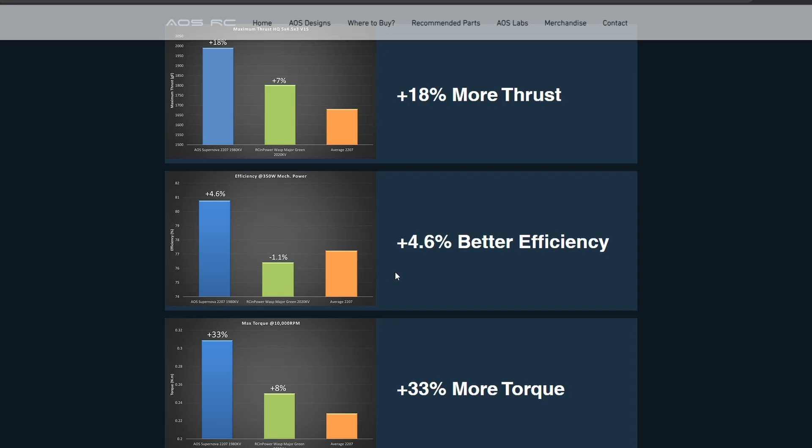About a month ago, a new brushless DC motor was released for use on drones, and the motor boasts some pretty impressive performance increases over pretty much every previous mini quad motor to have existed. And the performance boost is all thanks to what the designers are calling an optimized magnetic design.

And I'm going to be using the ANSYS magnetostatic analysis tool to look at some of the design decisions that they used in making this motor and try to see why they could have an improvement on the overall performance.

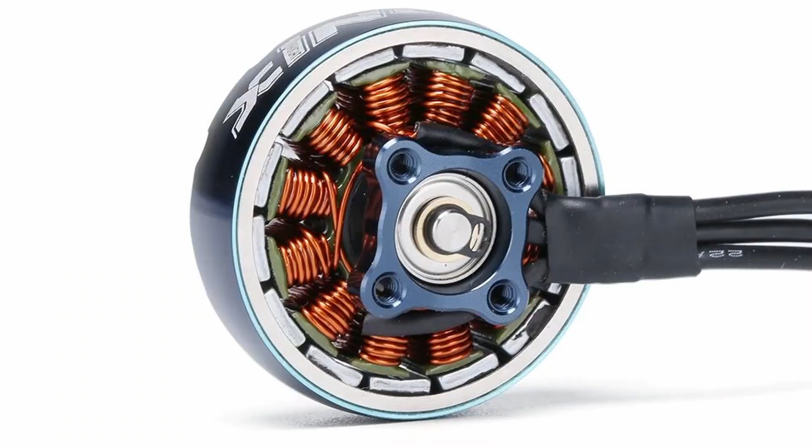So in a typical drone motor, there are a bunch of magnets kind of surrounding a central stator, and that's just the motor. But the difference of this new motor is that it has what they're calling flux rings, which are these little steel rings that go on either side of the magnets. And so in this very simple model of the motor, I've added those steel rings, and I've also modeled a motor with 14 magnets and 12 stator poles.

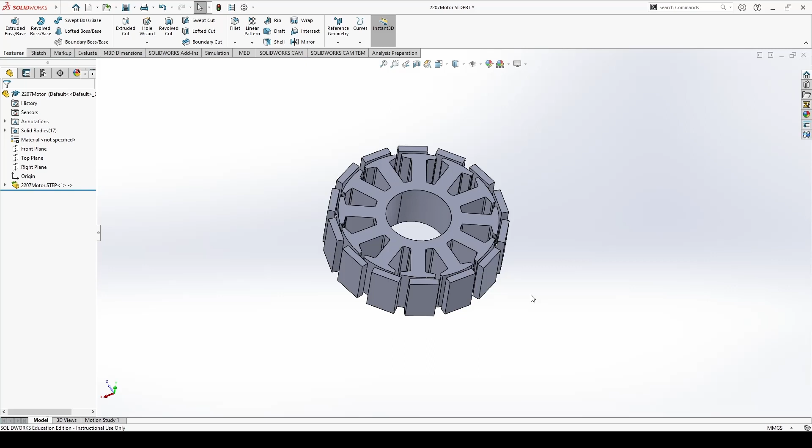We're going to start off in the analysis systems by dragging in a new magnetostatic study, and then we can go into our engineering data. I'm going to start by deleting the two default materials, and then we're going to add the custom materials, which will be an air material and then a neodymium 35 magnet material, which we'll call ND35. For the air material, we can drag in an isotropic relative permeability, and we'll set a value of 1, and the unit can be left blank.

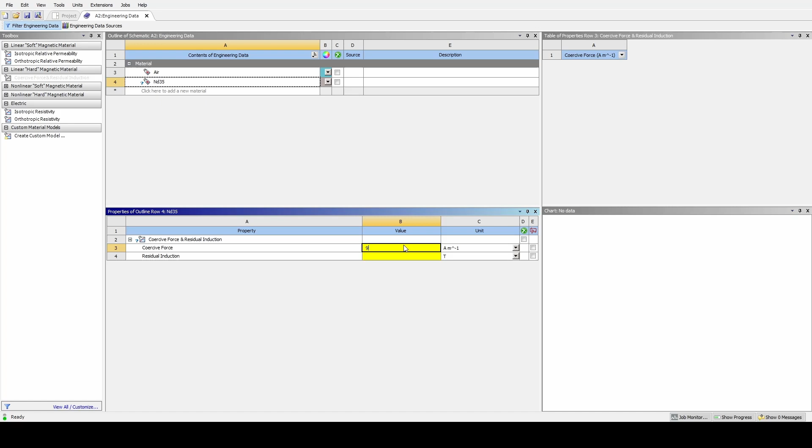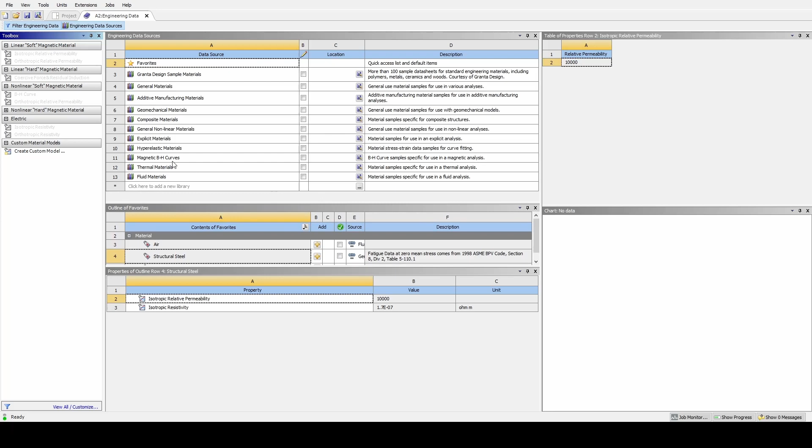And then for the neodymium magnet, we'll go into our linear hard magnetic materials and drag in a coercive force and residual induction. The coercive force is going to be 9e to the 5 amps per meter, and the residual induction will be 1.2. We're also going to open up our engineering data sources and open up the magnetic materials in the magnetic BH curves, and I'm going to select the M19 steel variety.

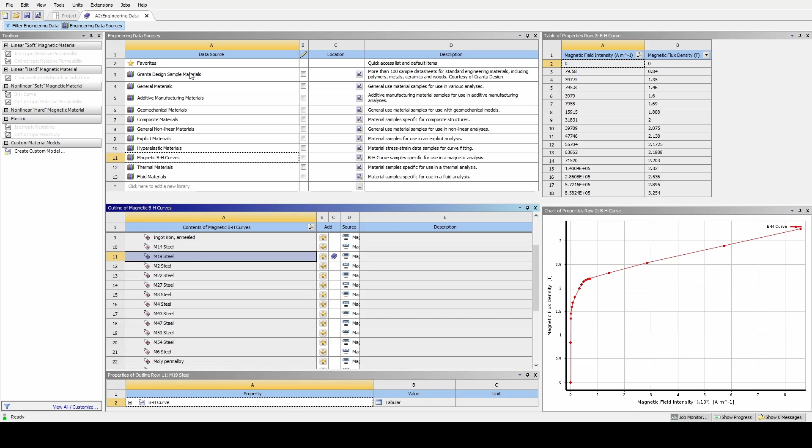So we can use the little plus button to add it to our materials list. And if we go back to our materials, you can see them here. I've also made sure that these materials don't have any additional material properties. It just has the magnetic ones. So we can go back to our project and open up the geometry in SpaceClaim.

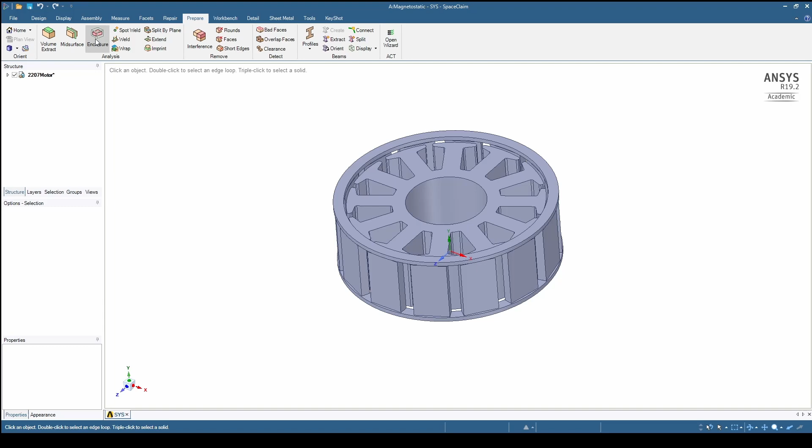And in SpaceClaim, you can see the rotor here with the magnets and the stator and the flux rings. So we need to add an enclosure. If we go into the Prepare tab, we can add that enclosure. And then we need to select all the geometry that we want the enclosure to include. So all the magnets, the stator, and also the flux rings.

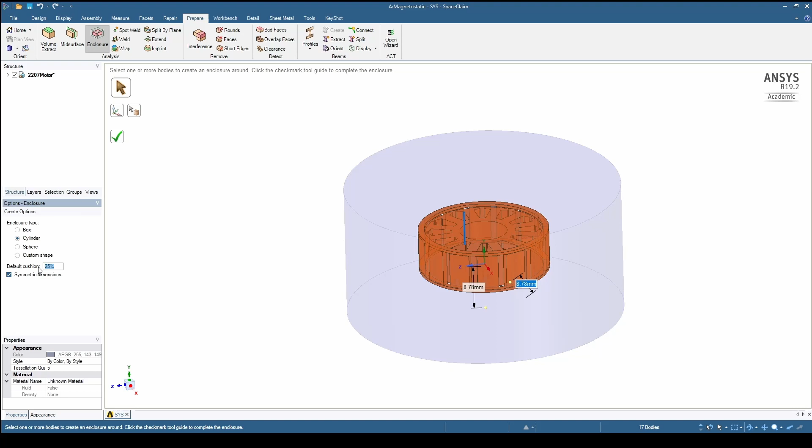And then we can change the type to cylinder. We also need to select the axis that the cylinder will be around, so we can just select any vertical edge here. And then I'm also changing the default cushion to 25% just to save some computational time. And one important selection that we need to make is we need to change the share topology to share rather than none.

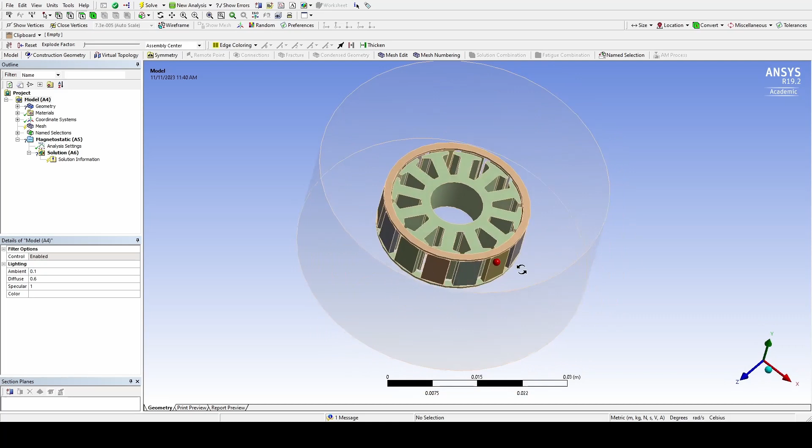Back inside the workbench, we can open up the model tab. You can see our imported geometry here along with the enclosure. If I open up the geometry tab, you can see some of the parts. I'm going to go ahead and rename some of these for simplicity. So we've got both the lower and upper flux rings. And then we can also rename each of the magnets just numerically from 1 to 14. And then we've also got the stator in the center and the enclosure.

And I'm also going to select all the magnets and assign the material to our neodymium material. And then the flux rings are going to be assigned to the M19 steel along with the stator. And then the enclosure.

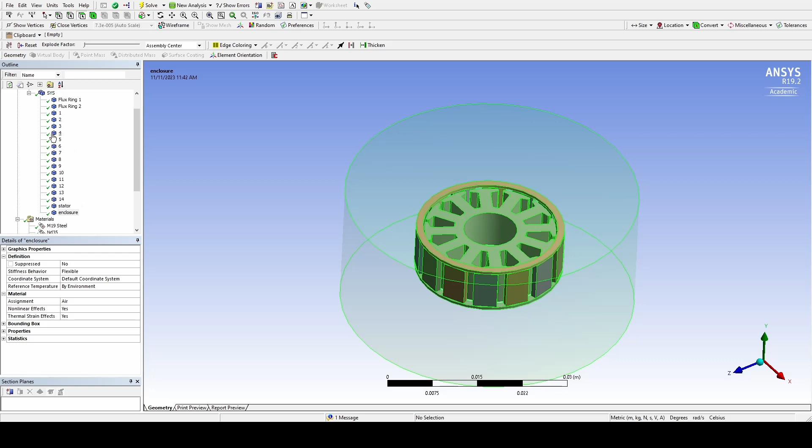And then the enclosure will be set to the air property. And then for the magnets, there's a property to specify the polarization. And so we need to go in and define a coordinate frame for each magnet that kind of dictates which direction the magnetic field points in.

So I'm going to go ahead and hide the enclosure, the stator, so we can get more access here. And then for the first magnet, which is this one over here, I'm going to select the face, and then we can define a coordinate system in the coordinate system tab. So we'll add a new one. We'll click on the face and use that as the origin, and we'll specify the X direction with a geometric selection. And so now we've got the X direction pointing normal to the magnet face.

So now in the geometry, we can click on the first magnet, and where it says coordinate system, we can choose the system that we just made. And I'm actually going to go ahead and rename that coordinate system so it's more clear. If we go back into the coordinate system tab, we can change it to be named 1 to match the first magnet. And you can see that that change propagated here.

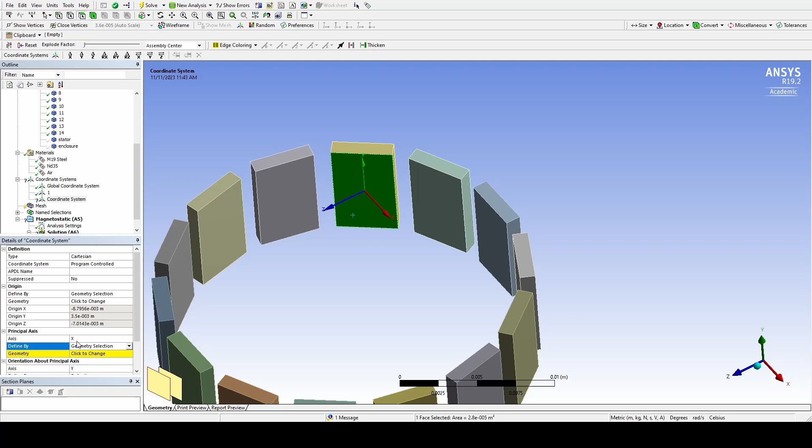So now we have to repeat that for the second magnet. So again, the process is just to create a coordinate frame that has the X direction pointing inwards towards the center of the circle. And then we'll just do that for all the magnets and then go ahead and assign it for all the different magnet bodies. So here you can see I made all the coordinate frames and they all have this X pointing normal into the center of the circle. And then I'm going ahead and assigning all of the magnets to their respective coordinate frame.

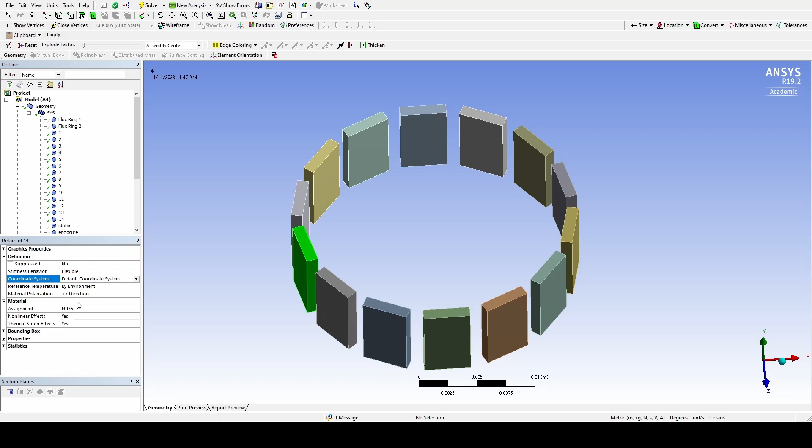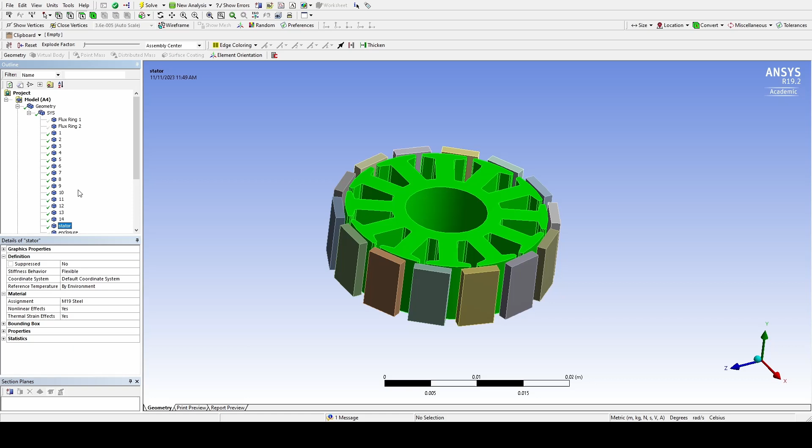And then we also need to take every other magnet and flip the direction because in the motor, the magnets have opposite polarity. And so I'm taking all the even magnets and changing the direction to X negative rather than X positive. So now all the magnets have their magnetic fields aligned in the proper direction. So we can move on to the meshing step.

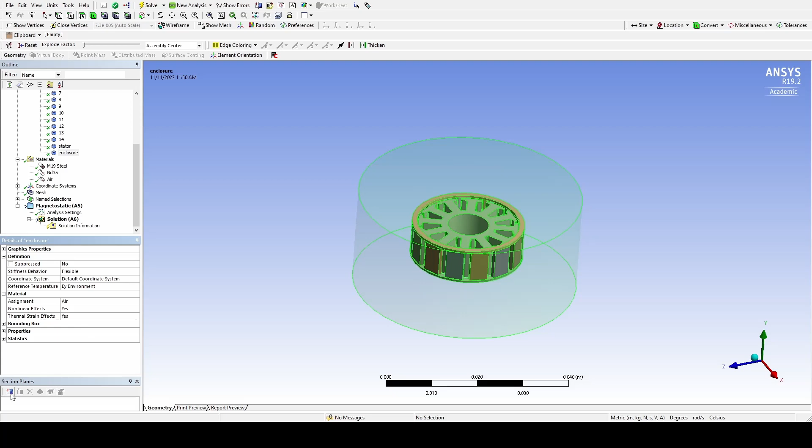Once I re-show all these bodies, I'll start by just generating the default mesh and we can see how it looks. And to get a better look inside, we can hide the enclosure, or we can also make a section plane view. So we can just draw a horizontal line and use that as a section plane and take a look on the inside. And the default mesh is looking okay, but we're going to do a little bit of refinement.

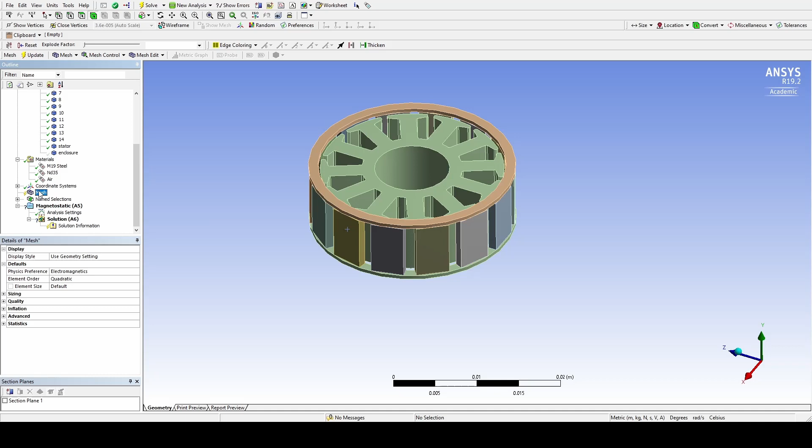So if I turn the section plane off, I can hide the enclosure and get a look inside. And what I'm hoping to do is add a little bit of refinement on the flux ring and the magnets themselves, since there are very few elements in those areas. So to do that, I'll add a sizing method and I'll select all the geometry that I'm going to refine. And then I'm going to set the sizing to 0.3 millimeters. And once we update the mesh, we'll see that it's looking a little bit more fine. There we go.

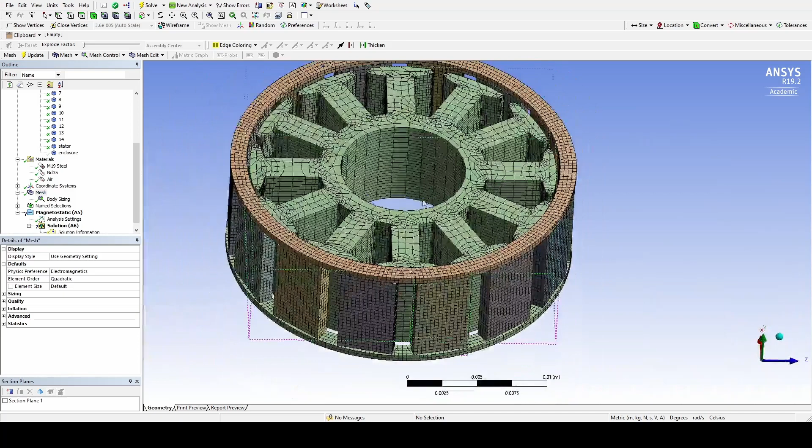And then the last step will be to add our boundary conditions. So that's set in the magnetostatic section. We just need to add a zero flux, like no flux boundary to the outside surfaces of the enclosure. And once that's set up, we can go ahead and run the study and generate the solutions.

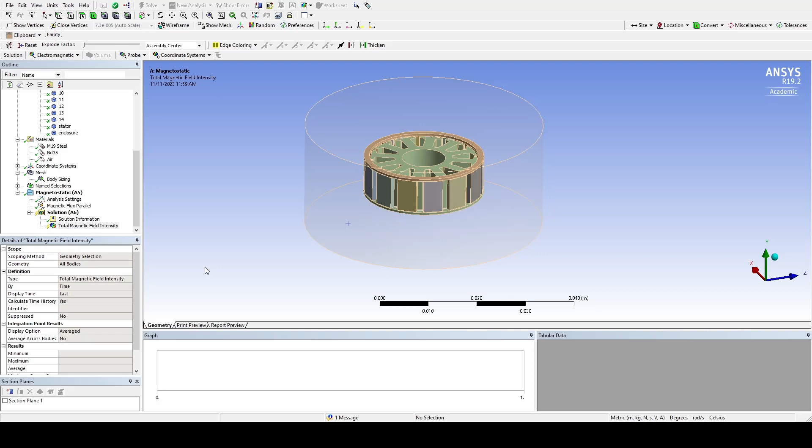From there, we can start to define some results. So I've added a magnetic field intensity result and evaluated it. And then we can look at our section plane view again to take a look on the inside of the magnets and the stator. I'm also going to turn on the smooth contours and remove the mesh lines so we can see it a little bit more clearly. And so this is an interesting result that just shows us what the actual field intensity is inside the magnet and inside the motor.

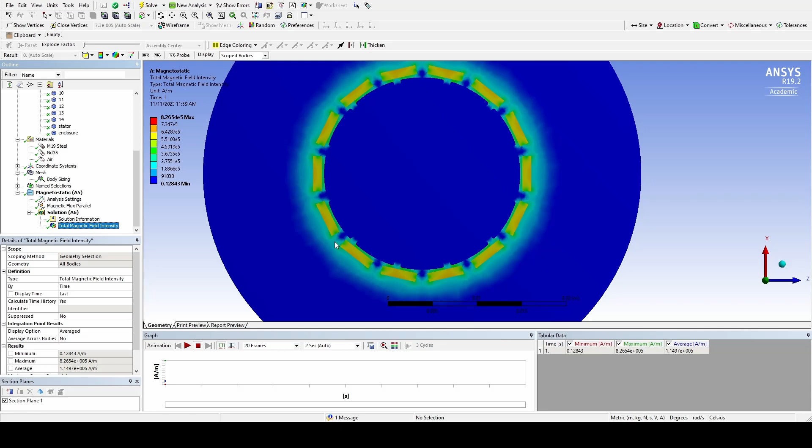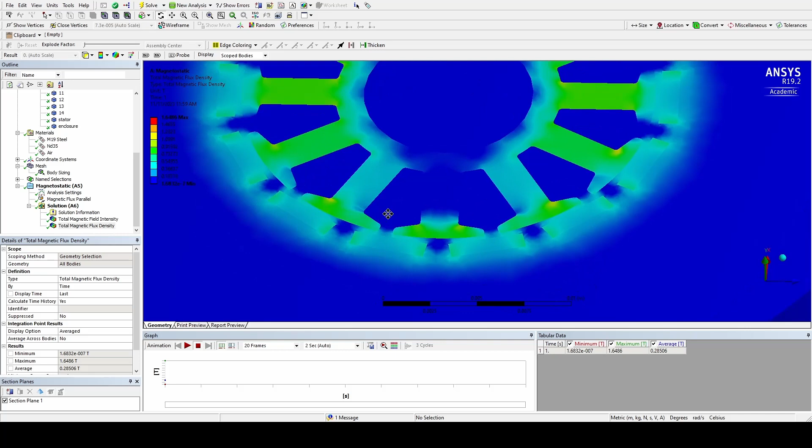I'm also just going to add a flux plot now for the total magnetic flux. And once we evaluate that result, this will actually show us what is inside the actual stator coils. And so this is a pretty interesting result. You can see the places where the magnetic field cancels out and also where it adds together to form a really strong field, which is quite interesting.

And I'm also going to add a geometric path that we can then plot along. So I'm going to specify a start coordinate at the center of the motor, and then the end coordinate will be kind of radially outward through one of the stator poles. So the y coordinate will be the same, but then we'll change the z coordinate. So you can see that line kind of through the motor there.

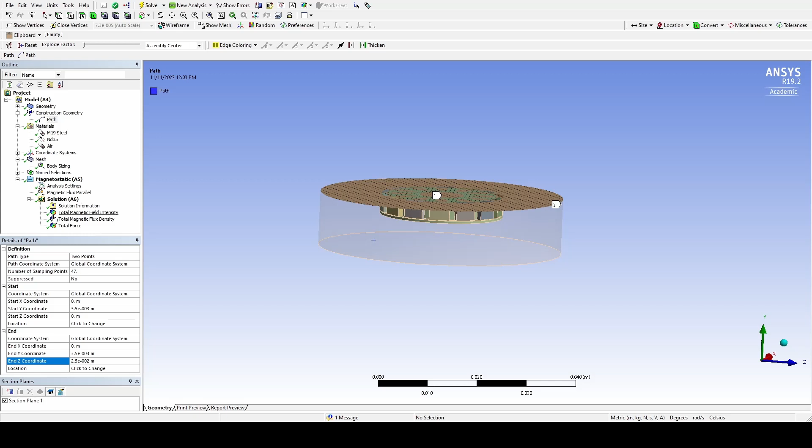And then if we define a new magnetic flux density, we can plot it along that path. And that will give us kind of like a data curve of the field strength through the stator of the motor at its maximum point. So we'll just change the scoping to the path that we just defined. And when we evaluate that result, we should get a little graph. There we go.

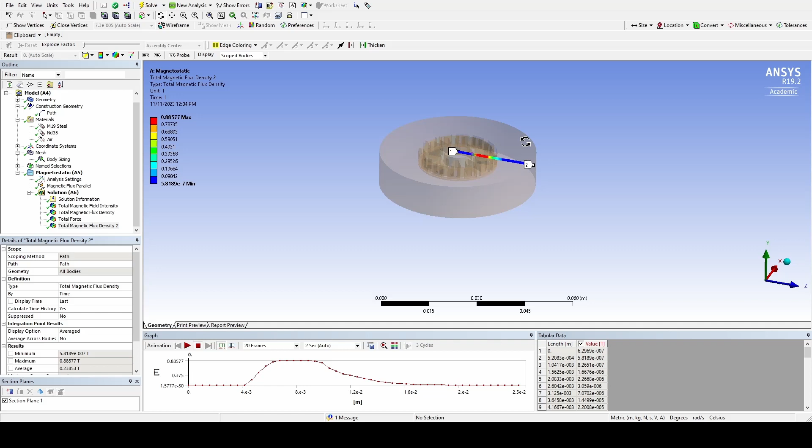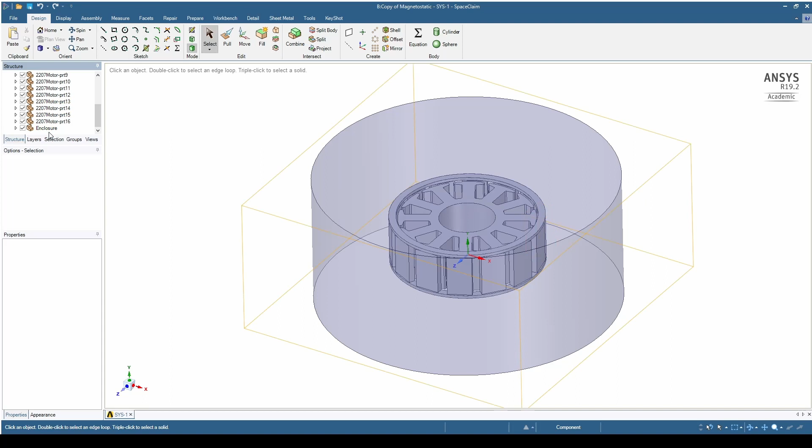And so you can see that the highest magnetic flux is right in the center of the core of the motor stator. So it would be interesting now to compare that total flux to a case without the flux rings. So I'm going to duplicate the project, reopen the geometry in SpaceClaim, and I'm actually going to delete the enclosure since we're going to have to remake it without the flux rings.

So I'm just removing it, and we're going to go up to the flux rings and delete those two components as well. And then just like the first simulation, we need to remake the enclosure. So again, that's in the Prepare tab. We'll just kind of speed through this part. So you just click the enclosure, select all your geometry.

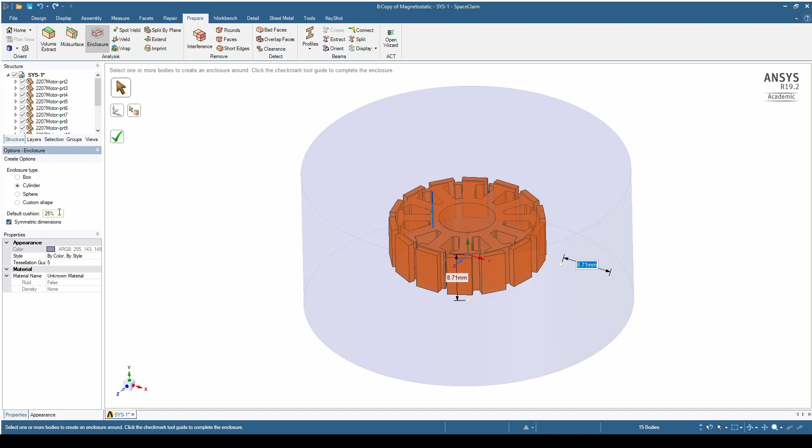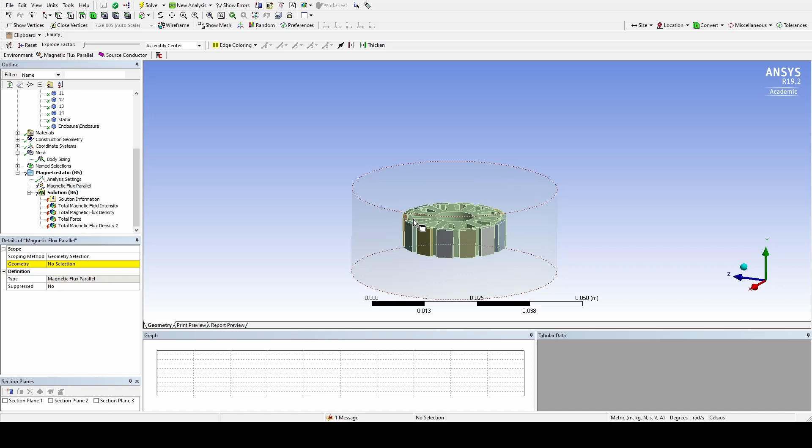So then inside of the Mechanical tab, we can reset the enclosure material assignment back to air since it lost its reference. And then we can generate the mesh for this new model. And we also need to make sure that we change the magnetic flux parallel boundary condition since we did redo the enclosure body. So once we apply that, we can run the study. And when it's finished running, we can take a look at the results. All these are basically the same, and we won't be able to see a huge difference.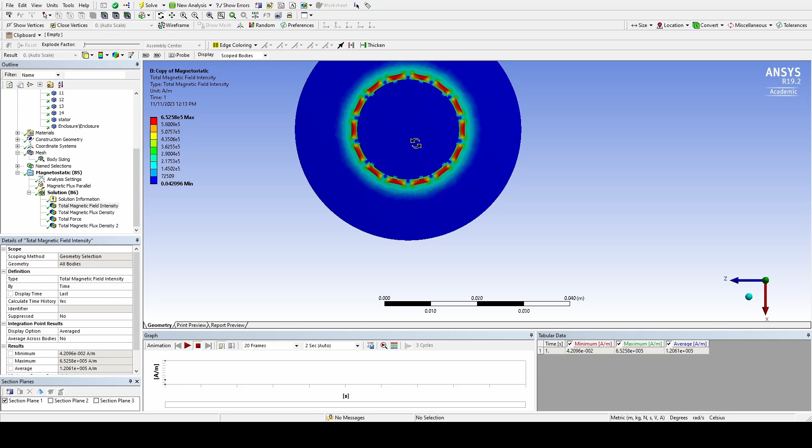But one of the things that I am curious to look at will be the total magnetic flux along that line that we plotted earlier, and we can hopefully compare that between the cases with and without the flux ring. So to do a good comparison, I'm going to grab the tabular data that is plotted along the line, and then I'm going to make a graph to compare it to the case with the flux ring. So I just go up here and copy it into a Google sheet.

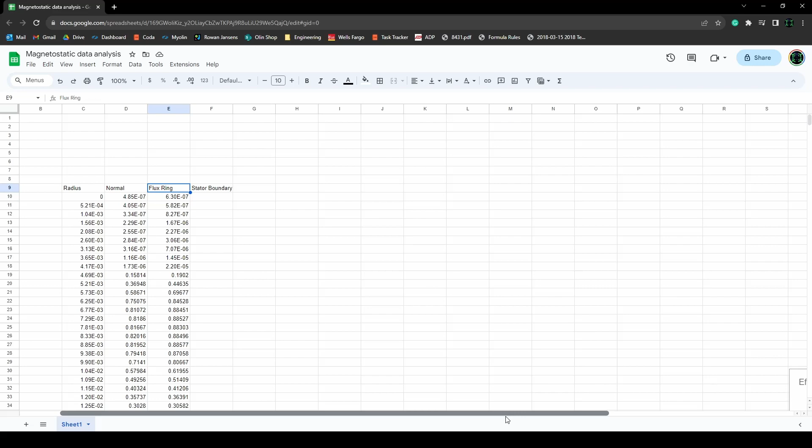So here I've copied that data in, the radius, and then the magnetic flux for both the normal and the flux ring case. And then I've made a plot of that. So what's pretty interesting is that we can see, let me just make it a little bigger here, we can see a notable increase in the magnetic flux in the core of the stator when we add the flux ring, which is quite interesting.

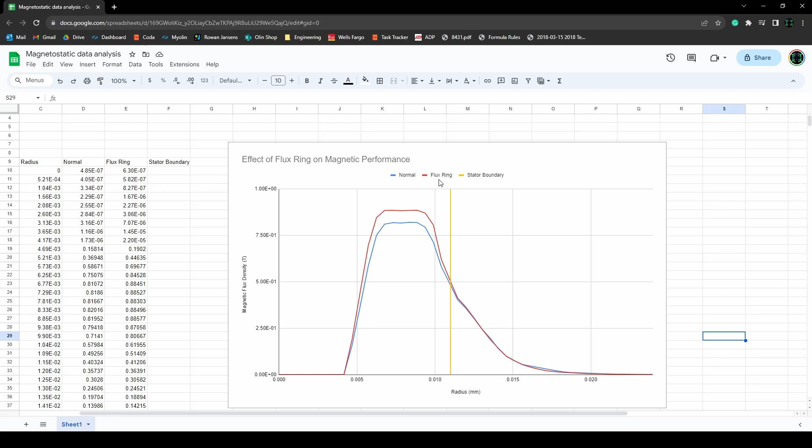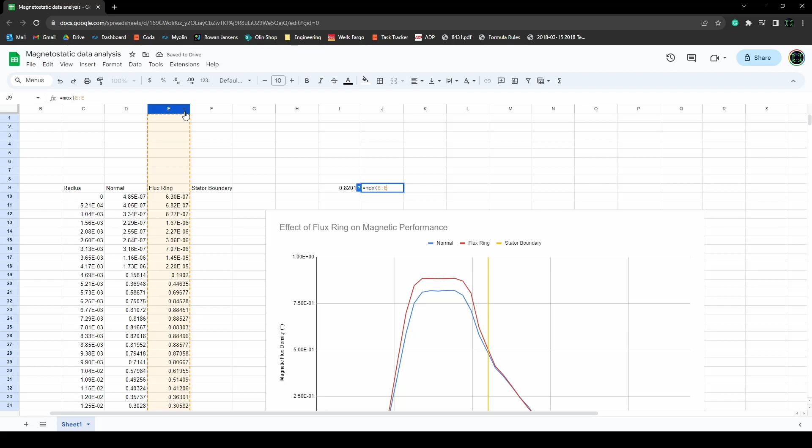And if we actually want to quantify the increase in magnetic performance, maybe what we could do is calculate the maximum flux in both cases. So if I just calculate the maximum of the normal case without the flux ring, and also the maximum of the model with the flux ring, then we can calculate a percent difference between these two. So select that. Oh, need to multiply by 100. And so we see that we get about a 7% boost in magnetic performance when we add these two little metal pieces, which is a pretty interesting result.

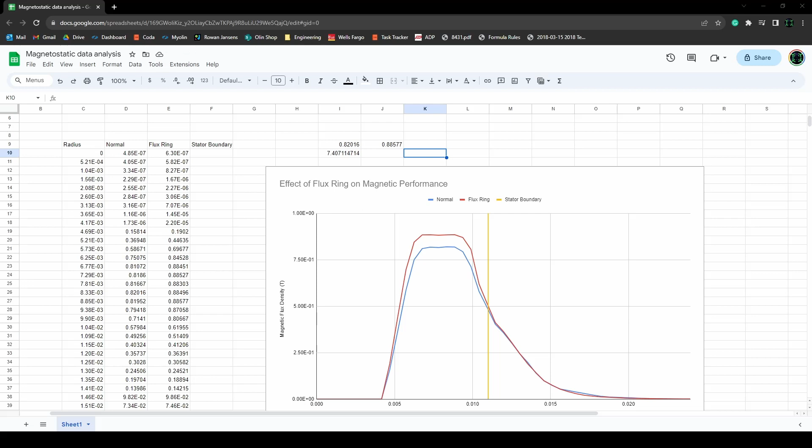So even though this analysis was rather high level, it still has some pretty important and meaningful results. Namely, it shows that magnets are pretty sensitive to the materials that are around them, and even adding a very small, lightweight little steel ring to a motor can actually have a pretty important effect on the magnetic performance. And so when you are designing a system that has magnets, performing some sort of magnetostatic analysis could be really helpful to try to squeeze out as much performance out of the system as possible.